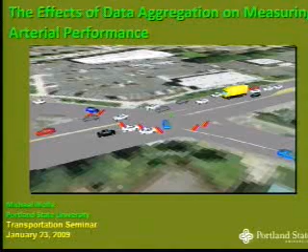Sure. My name is Michael Wolfe, and I graduated in 1996 from Macalester College in St. Paul, Minnesota, with a degree in mathematics. I spent 9-10 years working as a computer programmer before I figured out what I really wanted to do. It turned out to be the nexus of my love of bicycling with my love of mathematics and thinking about things analytically, and that led me to transportation engineering. So I saved up money and came back to school. Good afternoon to all of you, and thanks for coming out. As Dr. Bertini said, I'm going to talk about my thesis topic, the effects of data aggregation on measuring arterial performance.

Here's an outline of the talk. I'll start off with some background on the problem of measuring arterial performance. I'll go over some of the concepts that provide the foundation for the analysis. Then I'll talk about the simulation that I created to test my ideas, then the analysis I did on the data from the simulation, and finally wrap up with some concluding remarks.

I had 3 objectives in my research. The first was to examine methods of generating arterial performance measures from point observer data, specifically loop detector data. Loop detectors are ubiquitously installed, in just about every city. They're well understood, and they provide their data frequently to centralized locations such as an operations center. So they would be ideal for providing arterial performance information if we can figure out how. The second objective was to understand the effects of data aggregation on derived performance measures.

As ubiquitously as they are installed, there are sometimes questions about their density, and often loop detectors provide their data in chunks, either on a signal cycle by signal cycle basis, or in 5-minute or even 15-minute chunks. I wanted to understand what effect that had on the quality of the information we could get from these data sets.

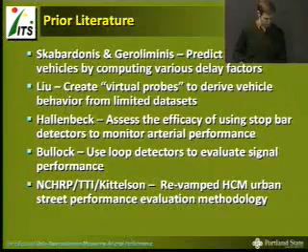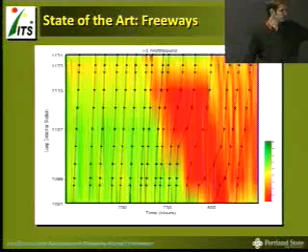So what we have here is a time-space diagram, and I'll be showing you a lot of these. In this case, it's a time-space diagram depicting freeway performance as measured by a set of stationary inductive loop detectors on the freeway. And it's called a time-space diagram because it has time on the x-axis and space or position along the freeway on the y-axis.

And each of these lines that runs vertically represents the movement of one vehicle down this segment of freeway over the section of time. And because you have position or location on the y-axis and time on the x-axis, it leads to the very convenient conclusion that the slope at a given point of one of these trajectories is proportional to the speed of the vehicle at that point in time or space.

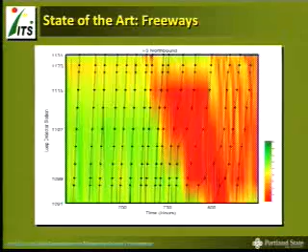You can ignore the background colors. That is known as a contour plot, and it represents the density that was detected at those locations, but it's not something that I consider in this talk. And so you can see that inductive loop detectors do a pretty good job of giving you a picture of what's going on on a freeway.

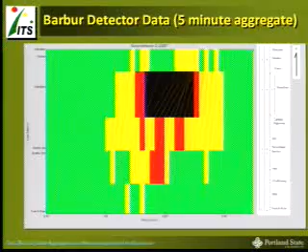And so this motivates my research. The work on this project motivated my research to say, well, okay, so is this actually good enough? And if not, what would be better? And how much better data would we need to get in order to give us a really clear picture of what's going on? And so finally, to finish up the preamble, I want to take a step back and talk about what arterial performance actually means.

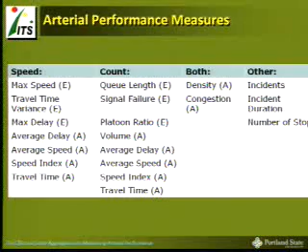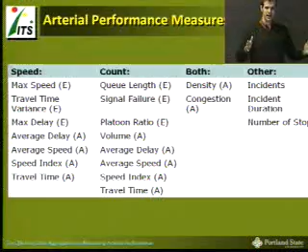And these performance measures represent obvious things like speed and travel time, various kinds of speeds, maximum speeds, average speeds, and so on. But then there are some more esoteric measures such as platoon ratio, which the Highway Capacity Manual uses to assess signal coordination to see how effective it is, and things like signal failure, which is the phenomenon when a green phase fails to exhaust a queue of accumulated vehicles.

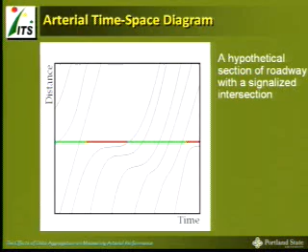So there are a couple of different ways that we can measure this hypothetical roadway segment. Let's take a step back and assume that we can build a big tower or send a helicopter up. And we go up there with a camera and we put the entrance of the roadway segment that we'd like to consider at the bottom of the frame, and the exit at the top of the frame. And so we just sit up there and we videotape vehicles going by.

Well, this would be spatial observation, and from this we can get vehicle density. So if you just take a freeze frame of that videotape at any point and count the number of vehicles that you see on the roadway segment, you've got the vehicle density. You can get the space mean speed, which is simply you record the speed that each of those vehicles is presently traveling at your freeze frame, and then you take the mean of that. That gives you the mean speed of vehicles that are in that space at that time.

You can get the actual travel time simply by timing how long it takes from a vehicle entering the roadway segment that you're videotaping to the time that it leaves. And finally, from that, you can get actual delay, which, once again, is the amount of time over free flow time that it takes a vehicle to travel a roadway segment.

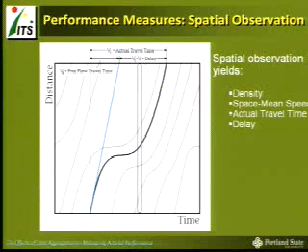But we don't really have the money to send people up in helicopters or build big towers to view every segment that we might want to evaluate. So frequently we are limited to point observations. This would be analogous to standing on the side of the street with a video camera and videotaping as cars go by, just looking at a single point. Inductive loop detectors make this kind of observation because they're located at a single stationary point, and they just know what's going on at the point in the roadway above them.

From this kind of observation, you can get flow data. You can get a perfectly good count of vehicles that pass over that point in space. You can get time mean speed, which is simply the mean speed of the vehicles that travel over this location. So if you take the speed of each vehicle detected at that location and then take the average of those, you get a time mean speed. However, this will overrepresent faster vehicles on the roadway because you'll have more fast vehicles traveling over a particular point.

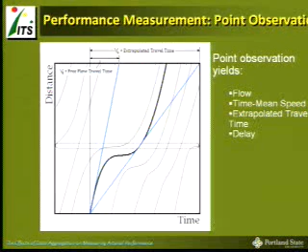Based on these speed readings that you take at this single point, you can extrapolate a travel time over a given roadway segment based on the length of the segment that you assume this detector is telling you about. But as you can see, the extrapolated travel time, which is this blue line on the right, might differ very much from the actual travel time. So if that blue line represents the extrapolated travel time of the vehicle detected on the black line, you can see a discrepancy between the extrapolated and actual travel time.

But from this extrapolated travel time, you can also calculate a delay, and it will have similar deficiencies based on just how good an extrapolated travel time you're able to make. I just point this out to keep in mind the limitations of point observation data, because that's what I'll be using in my analysis.

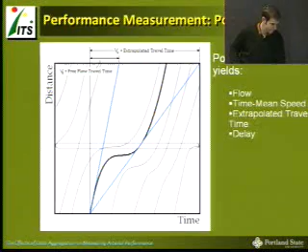Okay, so we've talked about the time-space diagram. I lean pretty heavily on that in my analysis. But another diagram that I look at, I refer to as a cumulative or input-output plot. In order to generate an input-output plot, we need a segment of roadway that is bounded by 2 detectors. And so we add a second detector to our hypothetical road segment.

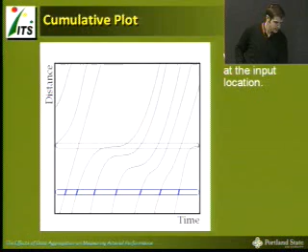Then we look at the vehicles that are detected at the input location, and we take note of the time that each vehicle is detected. And then we create this second type of plot, this cumulative plot. So once again, we have time on the x-axis, but then we have a count on the y-axis. And so in order to generate the cumulative plot, we just take note of the time that each vehicle is detected, and every time we detect a vehicle, we increment our curve by 1. And so this just gives you a running count of the vehicles that have entered the roadway segment.

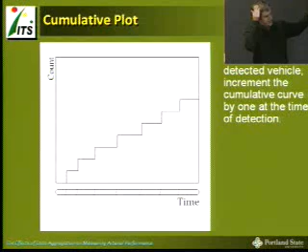We can also do the same thing at the outflow location. So we take note of the detector at the outflow location, and we make a cumulative plot for the vehicles that leave our roadway segment. Now, the neat thing is we can overlay the two. And this gives us a picture of the time that it took all of the vehicles to travel the length

of the roadway segment. So if you want to know the time that it took any of these vehicles to travel the length of the roadway segment, assuming that they don't pass each other, you can just look at the vehicle number. So if you look here, this is the third vehicle. Then the horizontal distance between those 2 curves just represents the travel time of the third vehicle. And if you want to know how many vehicles are on the roadway segment at a given time, you just take the vertical distance at that point in time, and that'll tell you how many vehicles are between the 2 detectors. So this is kind of a neat, intuitive way to consider this segment of roadway.

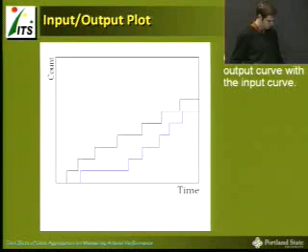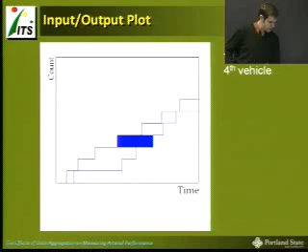Another way to consider the segment of roadway, though, is to subtract out the free flow travel time between the detectors, and this gives you a picture of the delay. So the delay for the 4th vehicle is simply this. It's the actual travel time minus the free flow travel time. And if you want to know the delay for all of the vehicles, it's just the area between the 2 curves. And if you want to know the average delay, it's just the total delay divided by the number of vehicles.

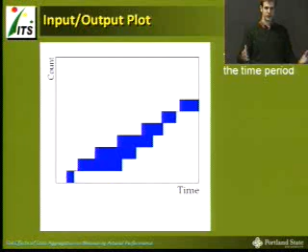And so I use this in my analysis. I use this delay plot as my first sort of filter for the travel time estimation methods that I propose. And I use delay because it's more intuitive to look at this picture and tell the difference between some delay and no delay. It's more intuitive to look at that than to tell the difference between a little travel time and a lot of travel time. It sort of suggests its own comparison there.

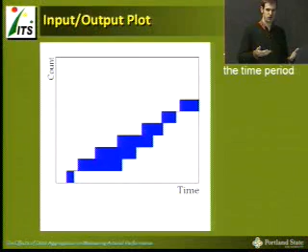Okay, and then the final concept that I'm going to talk about here is how we deal with aggregated data. In the case of aggregated data, we have to make some assumptions, and I'm just going to lay those on the table here so that you know how I'm approaching them. So for aggregated data, we're going to assume, in this hypothetical case, a single detector, but for this chunk of time, it's broken into 2 aggregation periods. And 2 vehicles cross the detector in the first time period with an average speed of x, and 5 vehicles cross the detector in the second time period with an average speed of y.

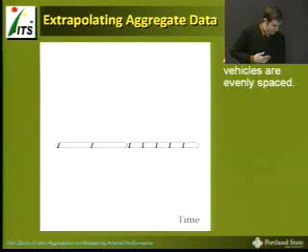Well, the first assumption that we have to make in the case of aggregated data is we have to assume that the vehicles are evenly spaced. In the absence of any better information, we just have to assume that they are spaced evenly. That's the assumption that I'm making, and I think that in the absence of any further information, that's the best assumption that we can make.

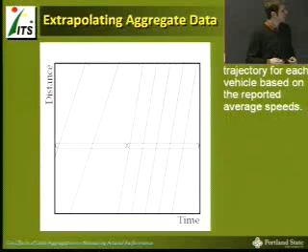Furthermore, we have to assume that the average speed that's recorded for each of those aggregation periods is the speed that each of those vehicles is traveling, because in the absence of any better information, that's just the best assumption that we can make. And then we extrapolate that average speed for each of the vehicles. And so we get this time-space diagram with these extrapolated trajectories that are based on our assumptions.

But we have to keep in mind that, once again, this could be very different from the actual picture. The light blue lines indicate some actual trajectories that might create aggregated data like we've shown, but they look very different from what the assumptions lead us to.

However, if we're conducting an analysis at the end of the day or on archived data, then we can get a slightly better picture of what's going on. But the important thing to note is that we can still create a cumulative plot even based on aggregated data. However, once again, we should keep in mind that the real picture might look rather different.

OK, so on to the simulation. In order to test my ideas, I created a simulation in VISSIM 5.0. Very cool. I created my simulation based on data that I got from a SCATS signal coordination system evaluation in a corridor in Gresham, Oregon. This signal coordination system was installed on East Burnside Road in Gresham, Oregon, from Eastman Parkway to the junction with Highway 26.

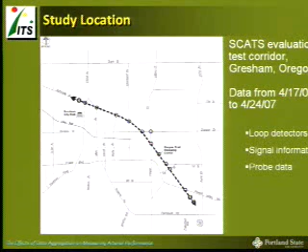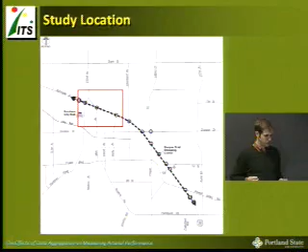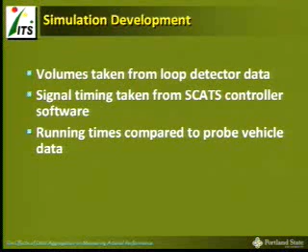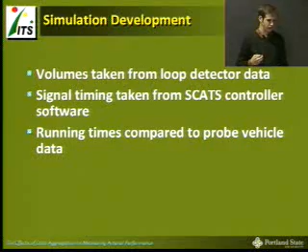There are other access points along this section of roadway in real life, but for simplicity's sake, I assumed that all movements on and off the Burnside Road corridor took place at the intersections. To create the simulation, my input volumes were taken from loop detector data, and I had a loop detector for each incoming roadway segment on Burnside and on all three of the cross streets. I got the signal timings from the SCATS controller software, and then to calibrate the simulation, I used running times that compared with the running times that the probe vehicles experienced.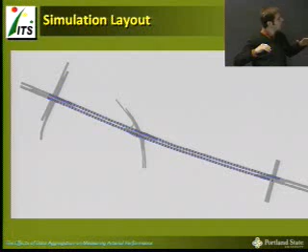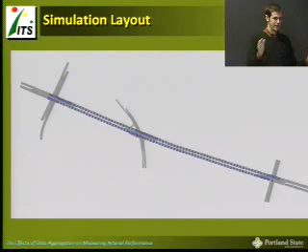In addition to that, though, it provides me with vehicle IDs, which I can use to construct more or less perfect ground truth trajectories. So I know exactly where each vehicle is on the roadway at all times, within the bounds, of course, of my detector density. So that gives me something to compare my estimation and prediction methods to.

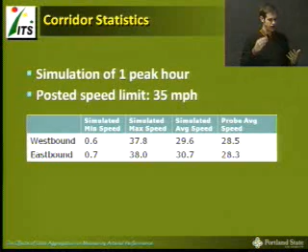So in calibrating the corridor, the simulation that I created simulated one peak hour, because I figured this was when the most interesting traffic phenomena would take place. The posted speed limit was 35 miles an hour, and my simulation max speeds were slightly above that. And then my simulated average speeds compared reasonably with the probe average speeds.

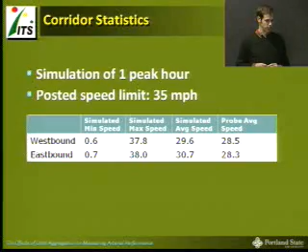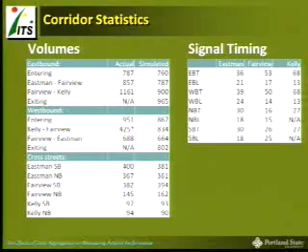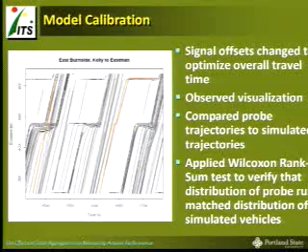Okay, so then to further calibrate the model, I compared my actual probe trajectories with my ground truth time-space diagram and saw behavior that was very consistent. I just simply observed the visualization to make sure that operations were proceeding in a realistic manner, that I didn't have any persistent queues, that I didn't have any queues that were backing up all the way to the previous light. And then I applied this Wilcoxon rank sum test to compare the distributions. Right, okay.

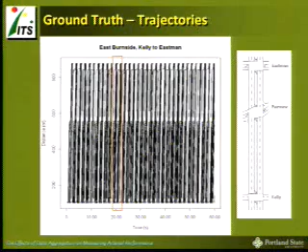So this is the full peak hour of simulated trajectories. It's kind of a mess to look at, but I just wanted to show you the whole thing so that you would know I wasn't hiding anything from you. But when I'm looking at a time-space diagram, I generally look at just a detail of 2 signal cycles. And this is what that looks like. It's a lot more decipherable. But the whole thing is there, no sleight of hand.

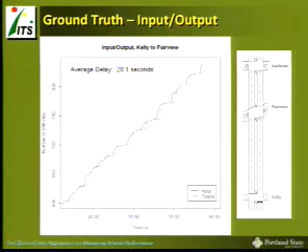And so the first filter of analysis will be to compare predicted input and output curves to this simulated ground truth input and output curve, and then to also compare estimated average delay to the actual average delay. This is just the first pass that I took to see what estimation methods might work well. Okay, so now we move on to the analysis.

So I looked at more than 4 different estimation methods. The first one that I looked at was this state-of-the-art midpoint method, which is what we use to very good effect on freeways. And I just wanted to see what the suitability of it being applied to arterials was. And then I came up with several other methods of my own to see if I could maybe take advantage of some of the facts of arterial operations to make a better estimate.

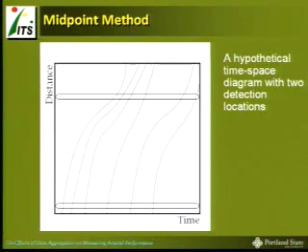So here's what the midpoint method is. We start with this hypothetical time-space diagram with 2 detection locations. And we extrapolate the speeds at the detectors halfway to the next detector and halfway back to the previous detector. And then for a given vehicle, we get the most recent speed information from each detector, right? So this just represents the best information that we have at the time.

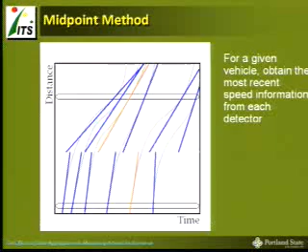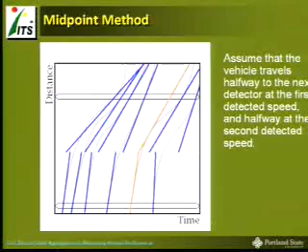And then to make an estimate of the vehicle's travel time, we just assume that the vehicle travels halfway to the next detector at the first detected speed and then halfway to the second detector at the second detected speed. And you can see it actually looks pretty good here. It's not too far off. But this is what it looks like when we apply it to our simulated data. It's kind of a rat's nest.

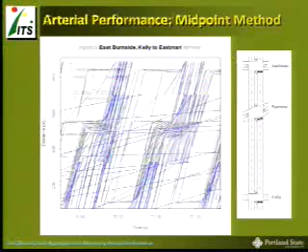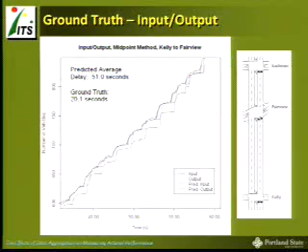And it's also predicting these persistent queues. And so at least in this case, it doesn't look like the midpoint method is working very well. And I hypothesized that this was for 3 reasons. The first is that we're collecting data at the stop bars, and so we're getting these funny speeds that are highly influenced by the proximity of the signals.

And another point is that the midpoint method doesn't take into account this very key piece of information that we have, that we're not going to see any vehicle movement on red phases. And so just because of the nature of the way that we're getting the speeds that we're projecting our vehicles to go at, we could potentially ignore that piece of information that we know as a baseline. And finally, there's no conservation of vehicles on arterial operations.

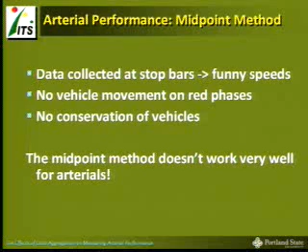If this is the case, if we had some kind of RFID tag, or some way to identify a vehicle's magnetic signature in such a way that we could label the entering vehicles vehicle 1, vehicle 2, vehicle 3, and we were able to do the same thing at the exiting detector, then we would be able to just connect the dots. And we would know the exact travel time for each vehicle. And this would be perfect. The problem would be completely solved. We would have a perfect answer to just what the overall performance was between those 2 detectors.

We might not be able to account for the places where we're not looking, right? We wouldn't be able to know what the curve looked like between there. But we would be able to know what time it took vehicles to get between the 2 detectors. But we have no way of making that kind of a match in this situation. But looking back at our time-space diagram, we observe that signals, especially signals that have a reasonable amount of coordination, have a tendency to group vehicles into platoons.

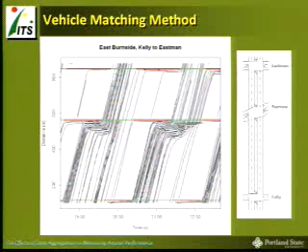And so on this previous slide here, we don't know where the entering cohort matches up with the exiting cohort. In this case, we know that the first vehicle at that green phase at the bottom is kind of going to be the first vehicle at the next green phase in the middle, which is going to be near the first vehicle in the green phase at the top. And so we take advantage of that in the vehicle matching method. We come back to our hypothetical time-space diagram, but this time we throw in the signal phases.

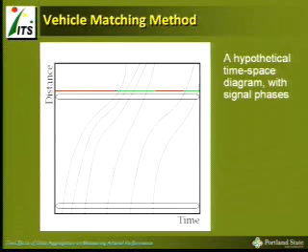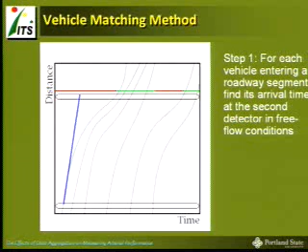So the first step in the vehicle matching method is, for each entering vehicle, we find its arrival time at the second detector in best case conditions, right? So this is the earliest that the vehicle could realistically arrive. And if it matches to something there, then that's great, but it's usually not going to. So the second step then is to match that vehicle to the next departing vehicle at the second detector. And we just do this for each vehicle entering the roadway segment.

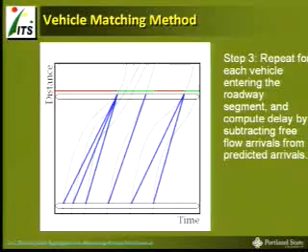And so from this, you can compute a delay and a travel time just by subtracting the arrivals to the segment from the departures from the segment. You can see already that this is just an estimate because it's matching several entering vehicles to the same exiting vehicle at the top. But as a baseline, it's not a bad place to start. And here's what it looks like when applied to our actual time-space diagram. And here's what the input-output curve looks like.

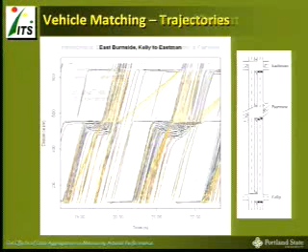And I'd say that's a big improvement over the midpoint method. You're seeing little triangles that are definitely underestimating the amount of delay that's going on, but they're in proportion, and they're following the tendency pretty well. There are a couple of delay segments in the middle of this curve that are substantially underestimated, but it seems like a good place to start.

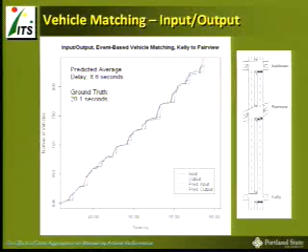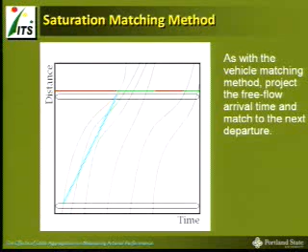Well, we have a little bit better information than even the vehicle matching method will give us, and that leads to the saturation matching method. We know vehicles aren't all going to discharge at once, right? We know that they're not all going to take that first match at the beginning of the green phase. And so we start with the vehicle matching method, and we project the free flow arrival time and match to the next departure. But then we save that match.

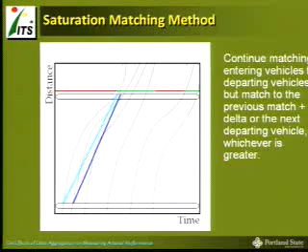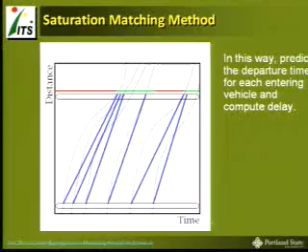And when we're matching subsequent vehicles, if we match to the same vehicle, or if we match to a vehicle before that, then we just match to the last match plus some saturation headway, right? So this takes into account the fact that we know the realistic spacing between vehicles as they discharge from a queue. And we're just assuming that if we get an unrealistic match, that we will match instead to a saturation density. And so in this way, we can once again predict delay and travel time.

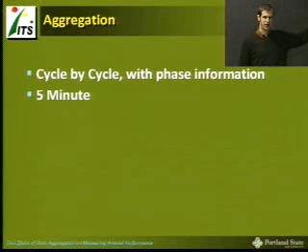Okay, so there was a fourth method that I'm going to talk about. It's the average departure method. I'm going to talk about that when I'm talking about the travel time analysis that I do later, as you'll see why. So now I'm going to talk about aggregation. So there are two types of aggregation that I consider. I consider cycle-by-cycle aggregation, where I just know how many vehicles went through in a cycle and what their average speed was during the cycle.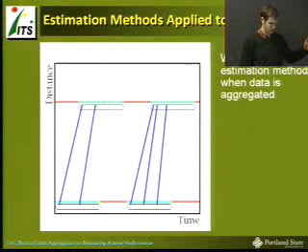But I'm going to operate under the assumption that I also know the signal phasing information for the signals that are adjacent to each detector, because that seems to be very important, especially for some of the assumptions that I'm making with these methods that I'm proposing. And then I'm going to just consider 5-minute aggregated data where I don't know phase information, just to see what that gives me. So first, just to remind you that we can apply the estimation methods when the data is aggregated, just using the assumptions that I went over in the concepts section.

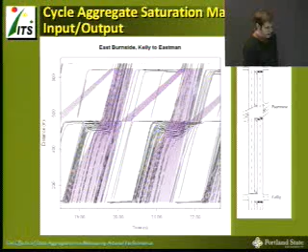So we start with a cycle by cycle. And once again, this is assuming evenly spaced arrivals and evenly spaced departures. And we just apply the saturation matching method to that, just in the way that I described. And this is what that looks like. And there is definitely some imprecision there. And here's what the input-output diagram looks like. But once again, this time we've smoothed out both the estimated input and the estimated output curve, but it still seems to be following the trends pretty well.

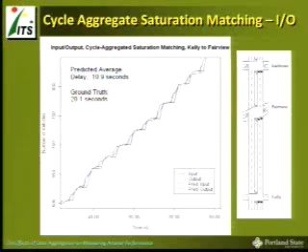And the estimated average delay isn't quite as good as when we had event-based data, but it's still not too bad. And so it's promising. We might be able to get something out of cycle-by-cycle aggregated data, presuming that we have the phase information. So now we apply the method to 5-minute data. And with 5-minute data, we just know how many vehicles came in during the 5-minute period, and we know their average speed, but we don't have any idea about the phasing. And so this is just the best assumption that we can make.

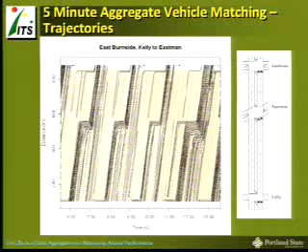And so even when we have a vehicle matching method or a saturation matching method, these really rely on us knowing what our platoons look like and matching between them. And so this isn't looking too good for us. And the input-output diagram bears that out. Both the estimated input and estimated output curve are this diagonal line from lower left to upper right, and it's not really predicting any kind of delay at all. And so we've lost too much information to make good estimates at this point.

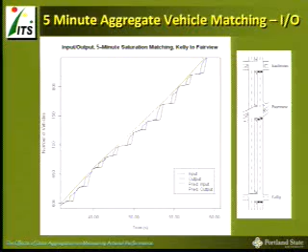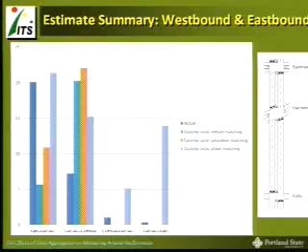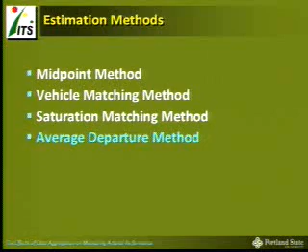So now I'm going to consider the travel times. And when I talk about travel times, I can bring up the average departure method. Well, this is what we know about average travel time given this hypothetical time-space diagram, right? So if vehicle detection A1 matches to vehicle detection B1, and vehicle detection A2 matches to vehicle detection B2, then the average travel time is just B1 minus A1 plus B2 minus A2, divided by 2. It's just a simple average, right?

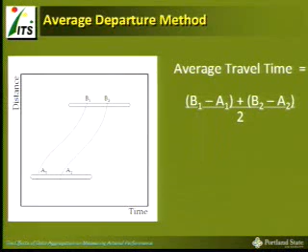But we can do a little bit of algebra to this equation here, B1 minus A1 plus B2 minus A2 over 2. And if we just do a little bit of commutation, it's just basic freshman algebra, we can come to the conclusion that our average travel time not only equals that thing in the upper right, but it also equals B2 minus A1 plus B1 minus A2 over 2. And a picture of that is this. So if we know that the detections A1 and A2 are the same two vehicles as B1 and B2, it doesn't matter how we match them. So this is very interesting, right? It doesn't really matter how we match them.

And furthermore, if we do just a little bit more algebra, this is no sleight of hand, I'm not making any other assumptions other than that math applies, we can come to the conclusion that B1 plus B2 over 2 minus A1 plus A2 over 2 is equal to the average travel time. Well, B1 plus B2 over 2 is just the average time of departure of all of our vehicles. And A1 plus A2 over 2 is just the average time of arrival of our vehicles. So we don't even need to match at all. Just assuming that the group of vehicles that arrives is the same as the group that departs, this is just as good as any method to compute average travel time.

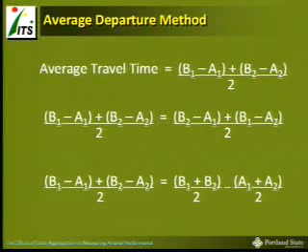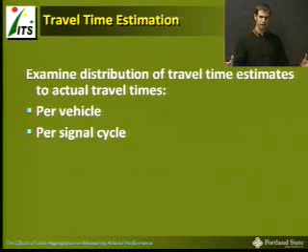Okay, so to conduct my travel time estimation analysis, I first compared the travel time estimates to the actual travel times on a per vehicle basis, and then I also did it on a per signal cycle basis. Per vehicle is a much higher bar to reach, but there are a lot of reasons to consider that per signal cycle travel time estimation is a little bit more useful, because a vehicle's travel time depends very highly on when it arrives during a signal cycle, whereas it's a lot easier to compare average travel times between cycles because it's not quite as dependent, assuming that you have reasonably good signal coordination again.

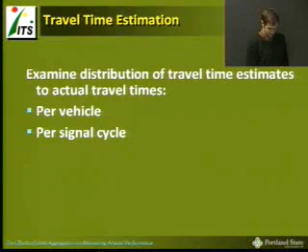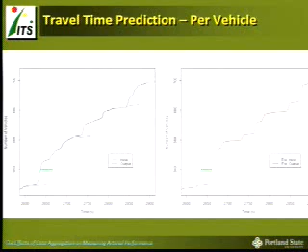Now, when I'm comparing per cycle travel time, then it's just the area on the left compared to the area on the right. And if we want to talk about average travel time, it's just divide by the number of vehicles that went through the intersection during the signal cycle.

Okay, so I compared the estimates to the actual travel times in two different ways. First of all, I looked at the distribution of the ratios for each estimate divided by the actual travel time. And so if my estimates are right on, then they will equal the actual travel time, and this distribution will just look like a big column at 1, right? It'll be a big spike at 1, and there'll be nothing lower or higher. But given that my estimates aren't going to be that good, we're hoping to see a big spike at 1 and then a gradual falling off as you move further away from 1.

And then I also created a linear regression with my estimated travel time as my independent variable and my actual travel time as my dependent variable, just so that I could quantify how well my estimates tracked the actual travel times.